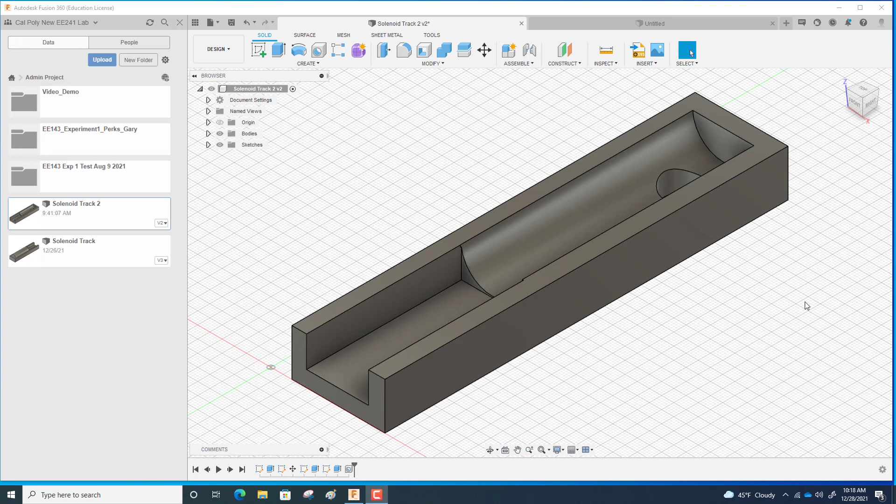So this is the solenoid track that I made in Fusion 360. Let's zoom out a little bit. It's just a block with a square portion cut out for the solenoid, and then there's this cylinder portion that the marble will roll on, and then the hole where the marble falls out, and goes into whatever Rube Goldberg mechanical structure you have.

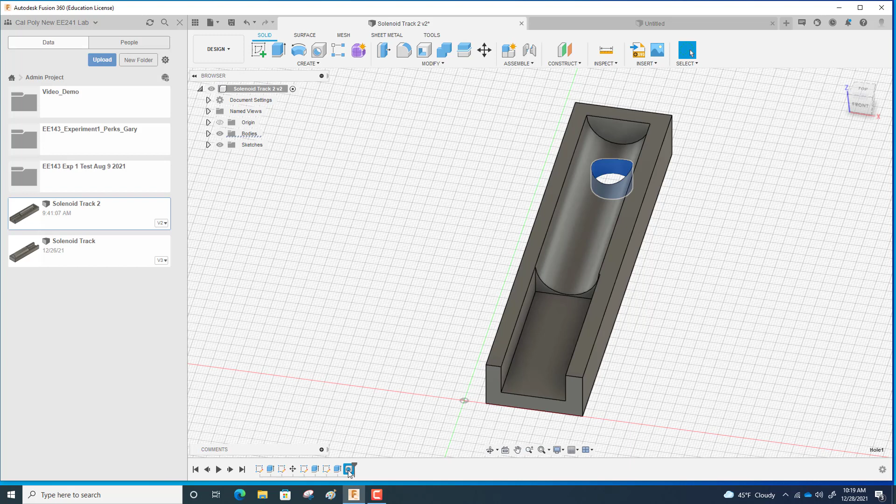So the steps, in reverse order: the hole is the last thing, and then there's a cutaway for the cylinder part. That circle is called a sketch, you'll see what that is coming up. And then there's a cutout for the solenoid. That square portion is where the solenoid fits in.

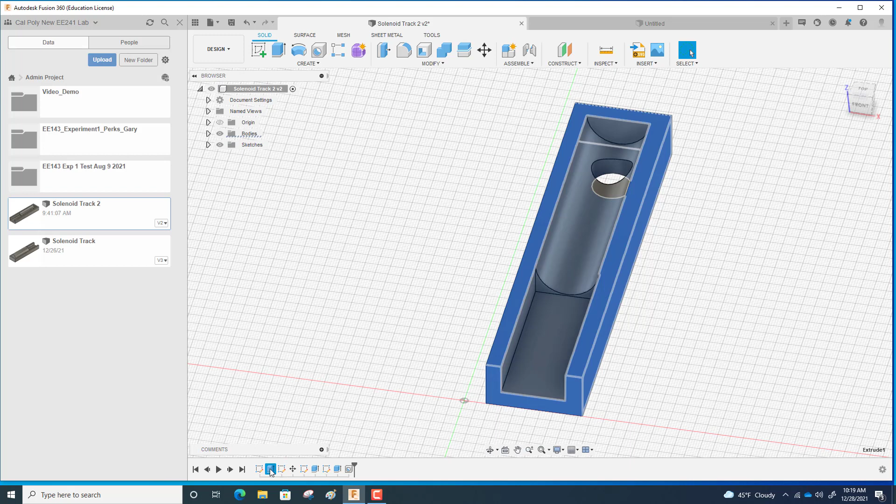That's another sketch. That was a move, another sketch, and an extrude to form the base before the cutouts. And then the first thing you do is a sketch. You'll see what a sketch is when I show you the steps here.

Let me just say right off the bat that I'm a novice at Fusion 360, so there's probably a more effective way of designing something like this, but I'm going to show you what I did.

One thing you do want to make sure when you open up the program: if the increments are not already set for 1 millimeter, you might want to go ahead and change that.

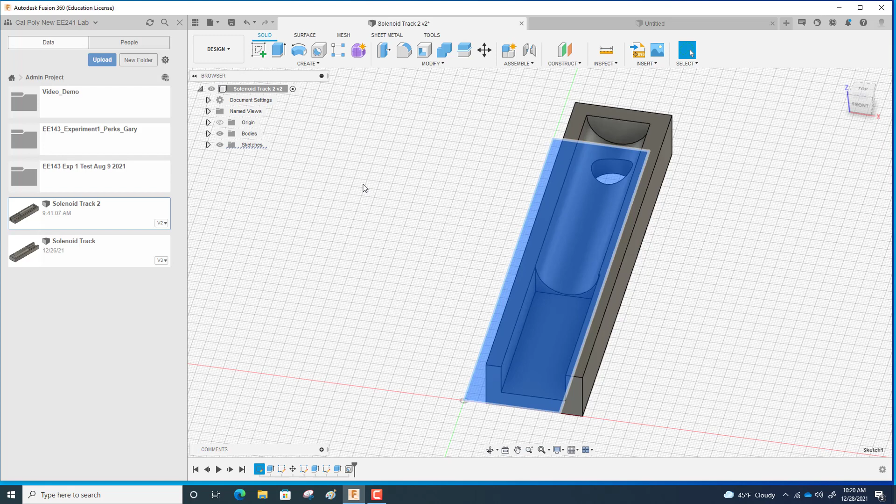Alright, so let me open up a file here so I can show you the steps involved.

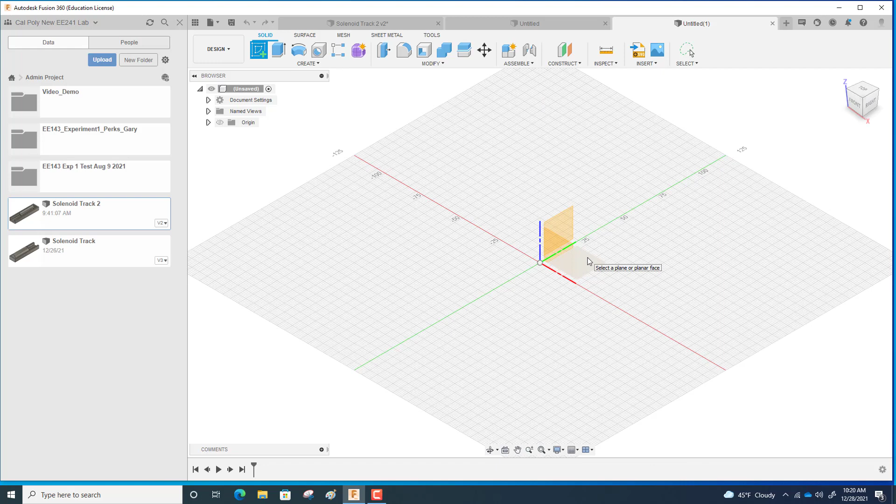So the first thing is you create a sketch. You come up here, create sketch, and you have to choose a plane for the sketch, and I'm going to choose the top plane. This gives you the view over here, the top view, and that's your top plane.

You click on the yellow square, and this palette comes up. When this palette is up, you know you're within a sketch, and you need a sketch to either build something, or if you have something and want to take material away, like you've got a block and want to take some of the block away, you also need a sketch. So you always pretty much start with the sketch.

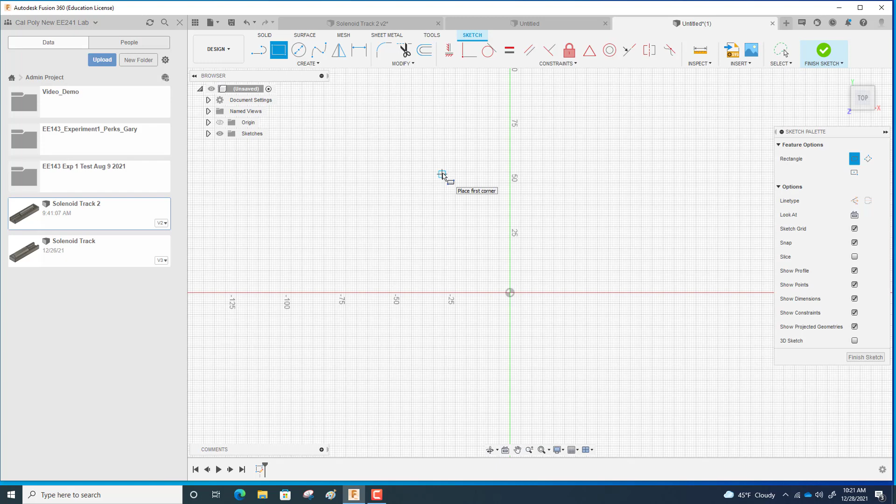So we're going to come up here to solid, 2-point rectangle. You just want to make a rectangle, and I don't know if you have to, but I always put the rectangle so that the origin is within the rectangle.

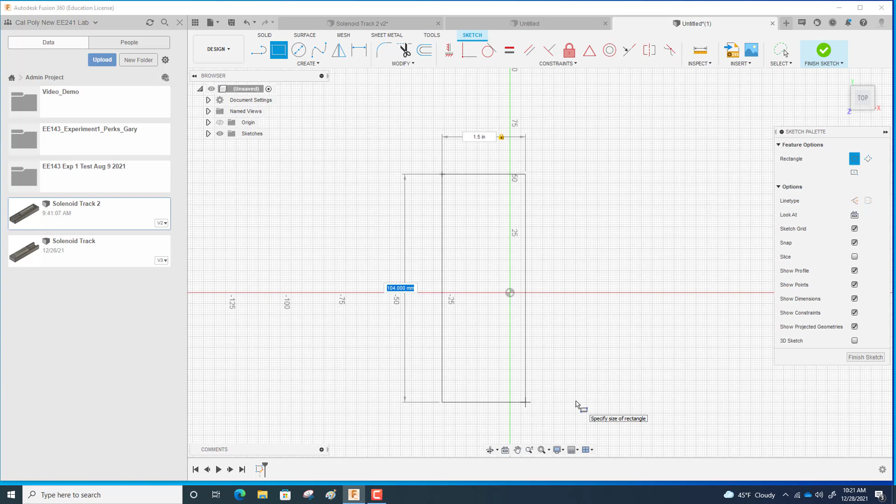You can see the top dimension is highlighted, and our width is, let's see, 1.5 inches I think, if I remember right. Let me measure my piece here. Yep, 1.5, and the length is 6.5 inches. So I'll put in 1.5 inches, IN for inches, then tab over to the other dimension, and the length I've got is 6.5 inches. Then you hit enter.

It took the inches and converted it to millimeters. So 1.5 inches is about 38 millimeters, and 6.5 inches is about 165 millimeters.

I have a mouse with a center wheel, which is really convenient when you use Fusion 360 because you can zoom in and out with the center wheel. You can also press down the center wheel to drag your view. So it's pretty convenient.

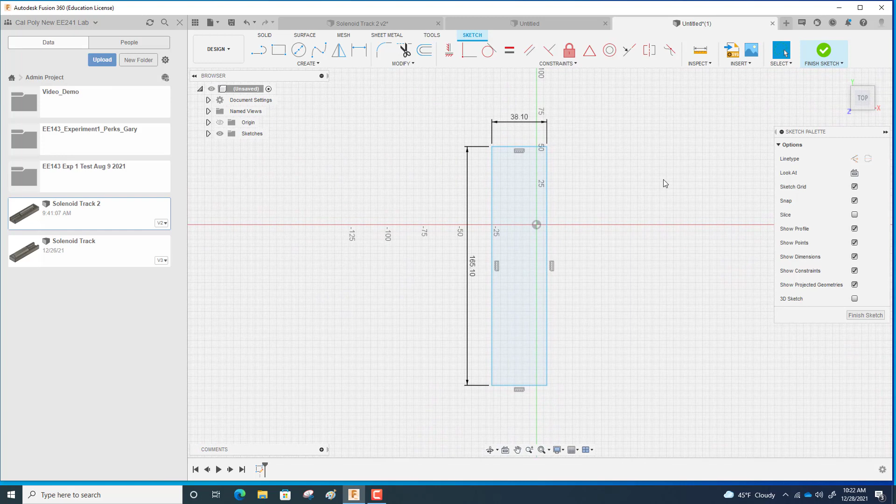Alright, so we are finished with the sketch. Now if you hit the home icon, it gives you an orthogonal view. And this cube is how you can change your view to look at the various angles, whatever view is most convenient.

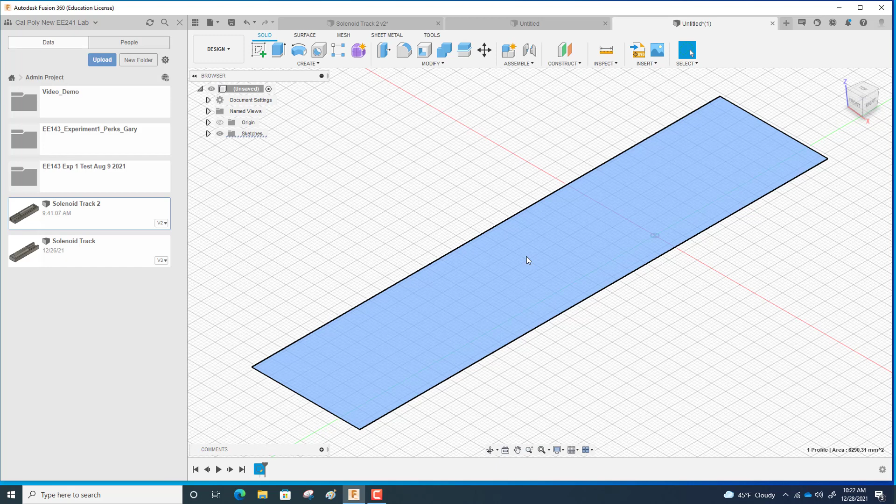Now I'm going to click on this surface, and we're going to do what's called an extrude. Up here, this is going to give the base height, and our height is 3/4 of an inch. That's what I used. Alright, so there, we've got our base.

This is basically our block that now we're going to cut away material to get our track piece. So let's go ahead and save this at this point. To save what you're working on, just hit the save icon up here.

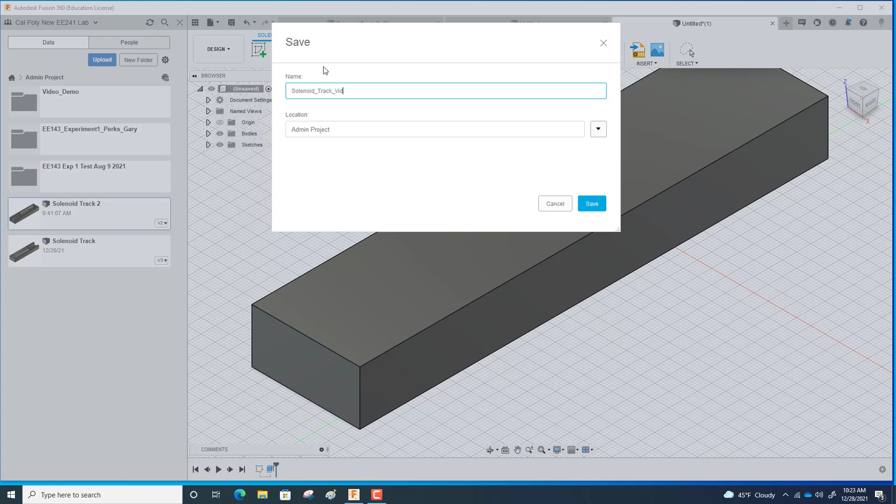We'll call this solenoid track... solenoid track video. Whoops, not spelling very good today. Let's see, video. And it'll just put it in this admin project folder. You can name different folders, but I'm just going to keep it there. So we'll save this.

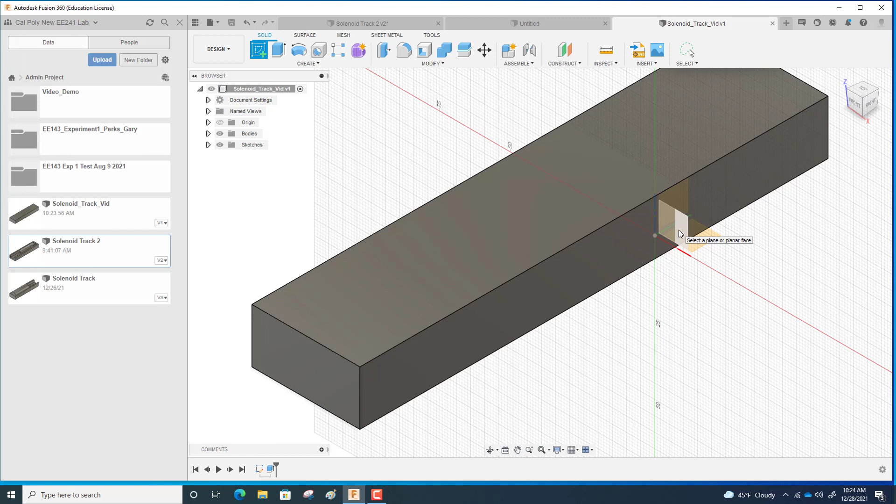Okay, so now we need to do another sketch because we're going to cut away some material. We need a sketch to do that. So create sketch. And this time I'm going to use the sketch in this plane here because I want to cut into the material lengthwise. Alright, and we're going to do another 2-point rectangle. I'm just going to draw one here within the block.

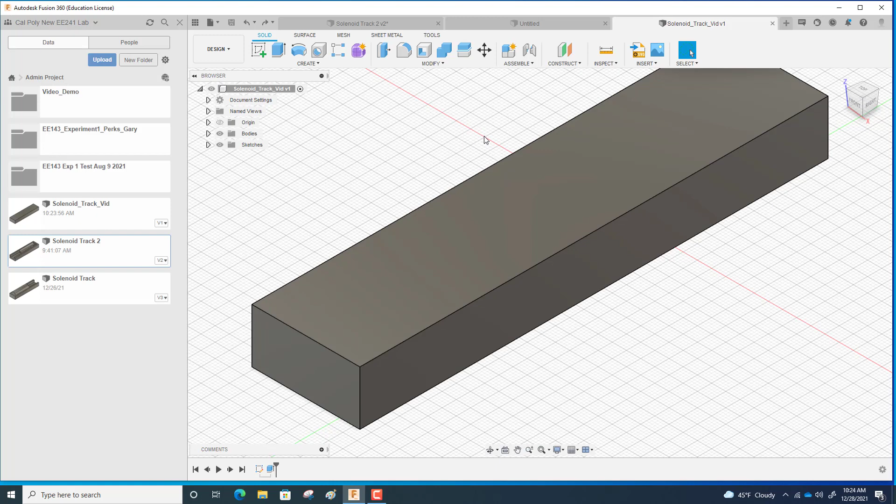Oh, let's back up here a minute. Let's back up. We should move this block first, because when it makes the sketch, it's on this origin. So let's hit the move. I can just back this up here. I just want to back this up about to the origin here, so right about there.

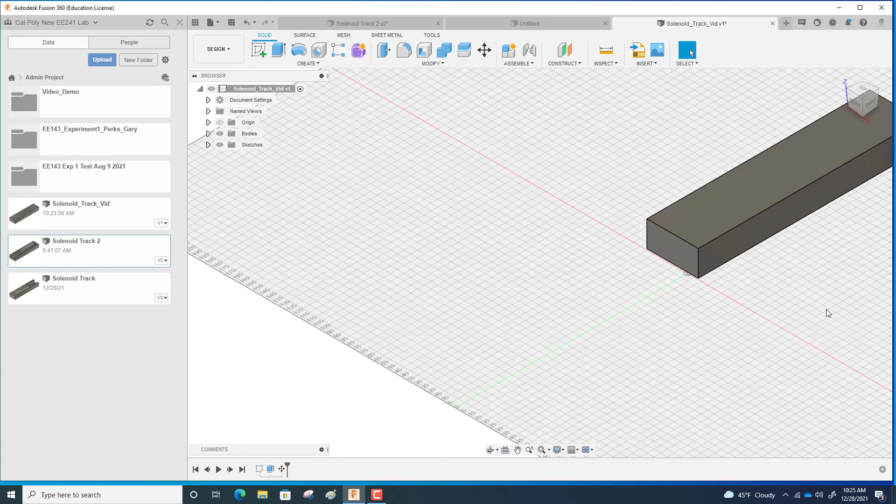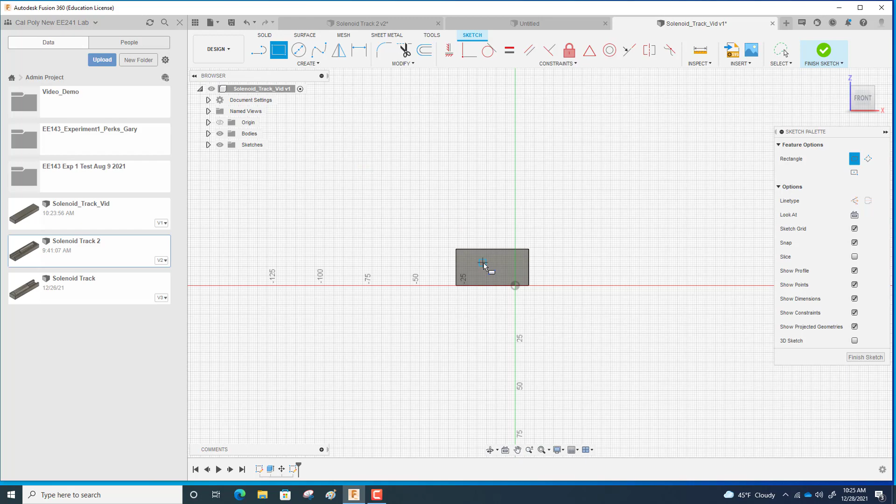And that's because when we create the sketch and choose the plane, it's right at the origin. So if I had the block where it initially was, the sketch is like within the block, and I want it to be on the edge, because we're going to cut into it lengthwise. Alright, now we can do our 2-point rectangle. Let's see if we can make this bigger here. And I can drag it over. Alright, so I'm just going to put this rectangle within here and then put in dimensions.

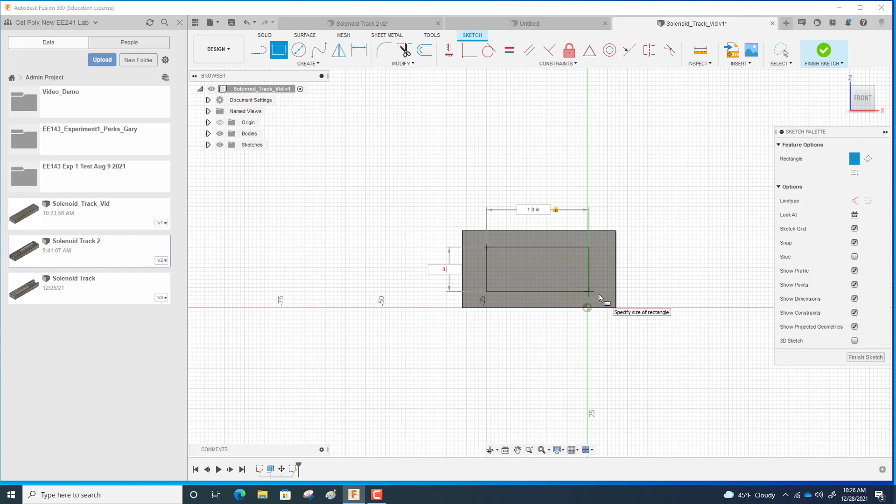Let's see, the square notch is 1 inch by 1/2 inch. Alright, so 1.0 inches, and then you tab over for the other dimension. 0.5 inches, and then once you get the dimensions, you hit enter.

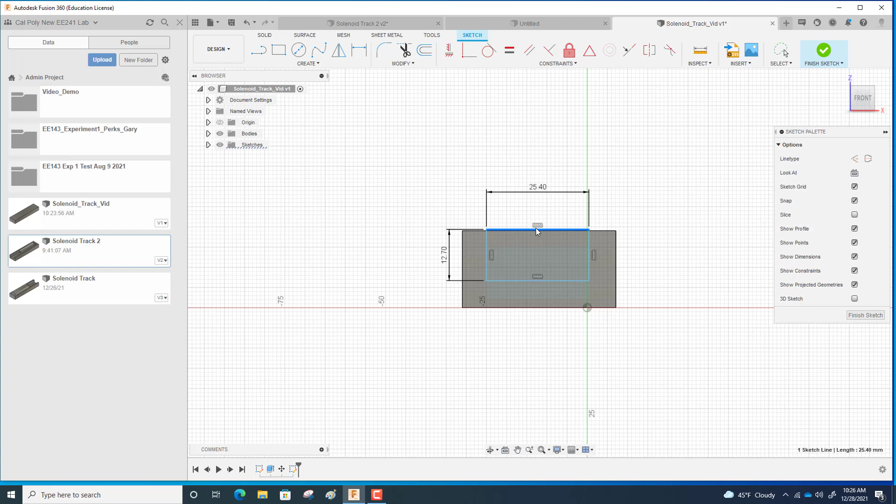Alright, so now we want to move this sketch, and I want to make sure it cuts away all the top, and I'm going to eyeball it as far as centering it. See, I'm counting the squares there. 7. What's on this side? Oh, maybe a little bit over. I think that should be close enough. Alright, and then you select this, and let's see, finish sketch, and then we want to do an extrude.

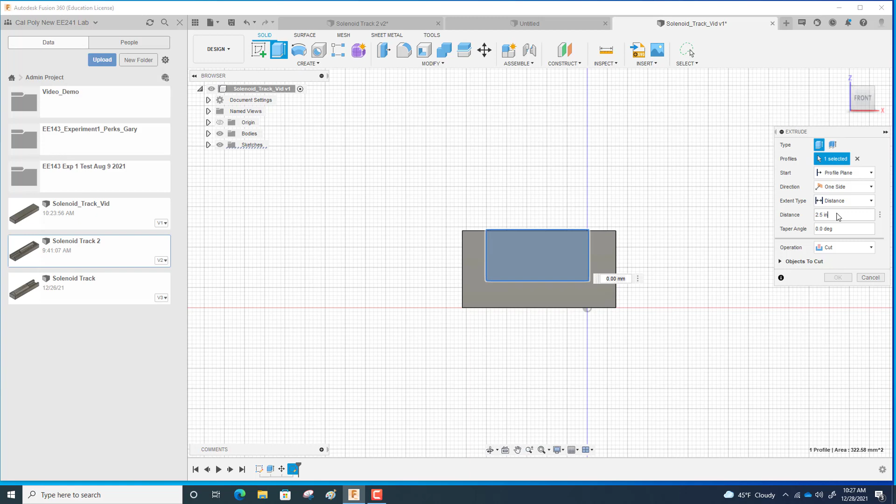Alright, so now we want to cut away material, so down here at operation, you want to choose cut, and we're going to cut into this. Let's see, what is it? I think it's 2.5 inches. Yeah, about 2.5 inches. So this distance here is how much we're going to cut into it. So 2.5 inches. And okay. Let's see, how did we do? Yep. All right, it worked. Okay, so you see it made that square notch.

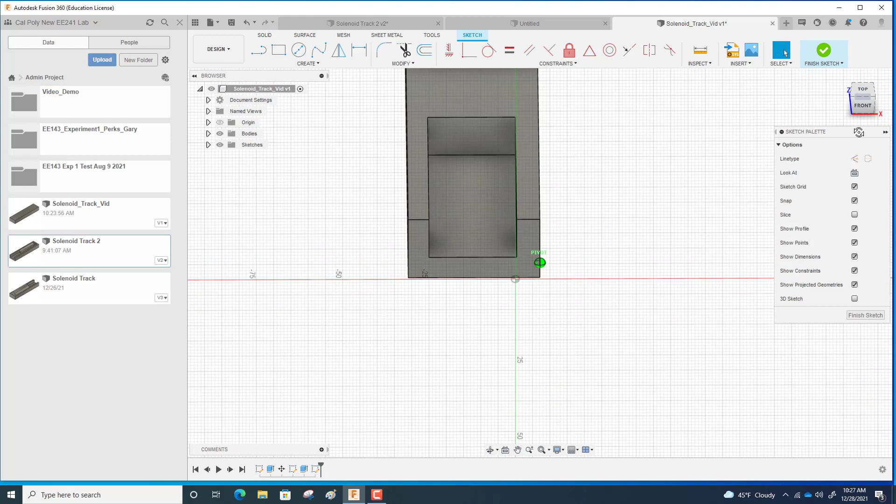All right, now we want to do the cylinder part. So we need another sketch for that. Select the sketch, and again we want this plane here because we're cutting into it lengthwise. Okay, we're gonna need a circle. And let's see, we're gonna center this. Now, you don't have to be super precise here. I'm just gonna eyeball it. So, yeah, it looks right about there. It looks close to the center, I would say.

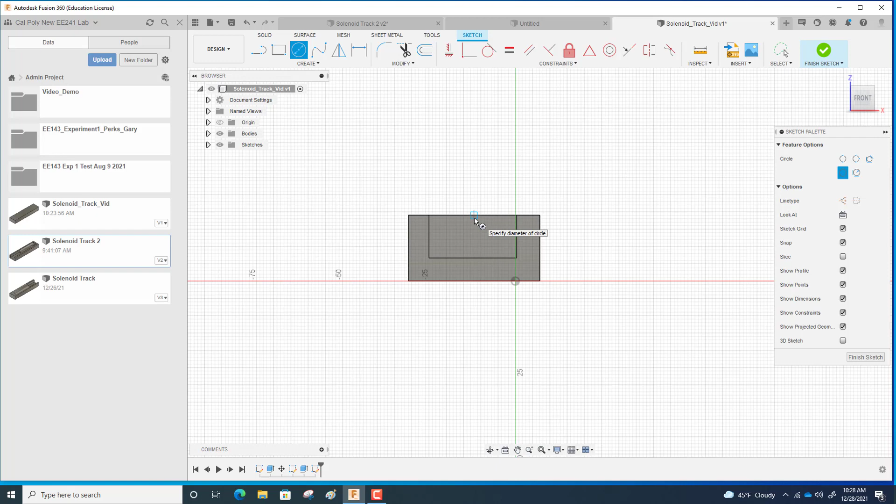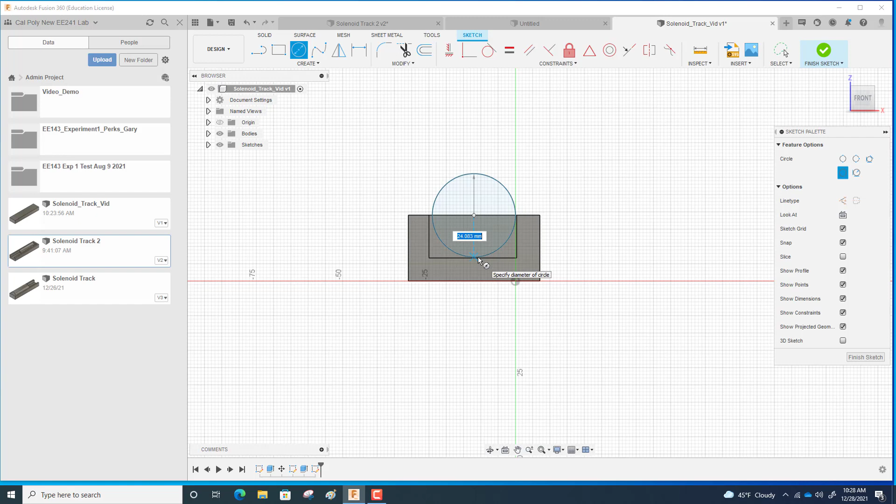All right, and then we're gonna expand this out. So it looks like right about there. Let's see, if we move it just a little bit here. Let's see, we'll say it's like 25 millimeters. What does that give us? Oh, I somehow got two. Looks like I got two in here. Let's back up. Alright, there we go.

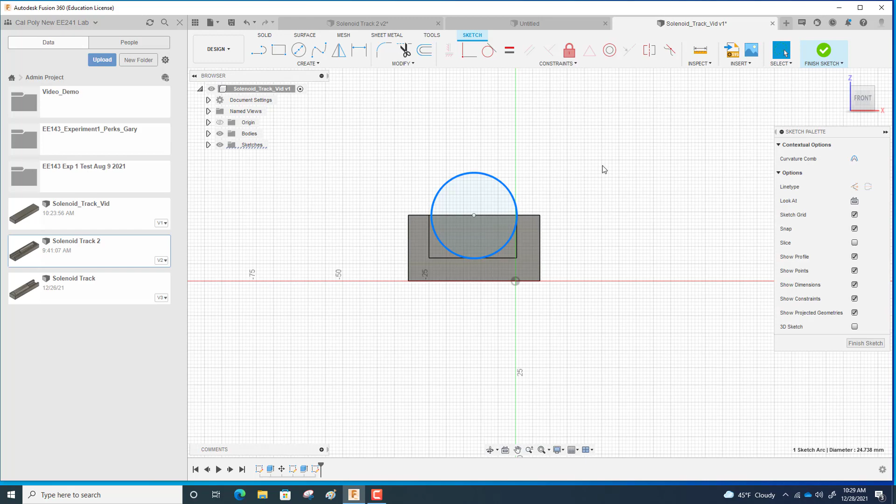And let's see. Yeah, right about there. Alright, that should be close enough. Alright, so now that's the sketch. But now I gotta move this. Or actually, I don't have to. I could just do it. I was thinking I could move this to where we're gonna start the cylindrical. Yeah, actually I should. So let's move this.

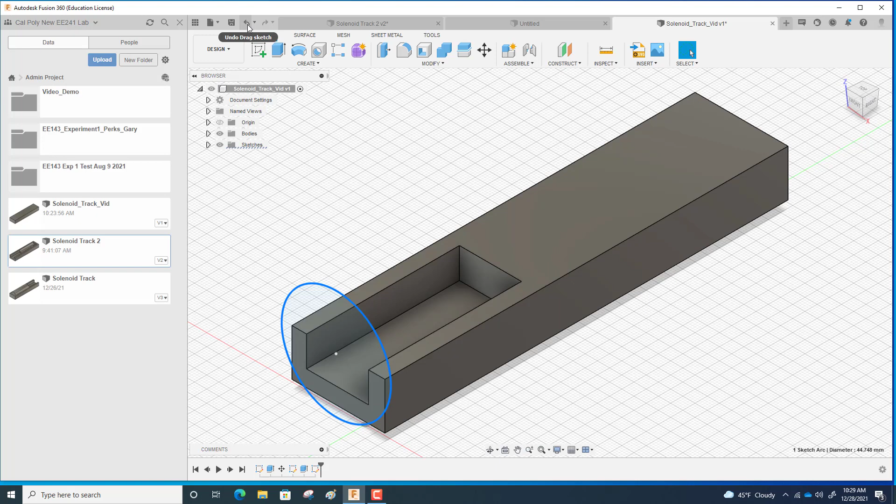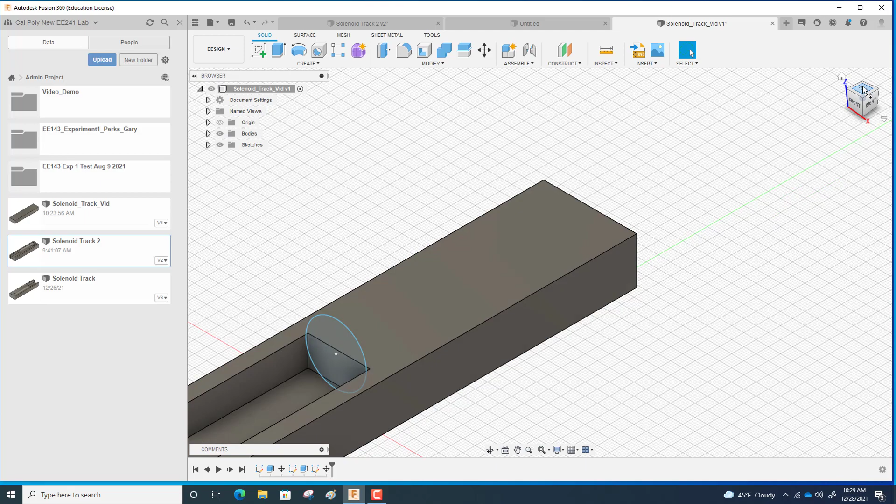Oops. Move. Right, move this like this. Let's take a different view here. Let's see. I gotta move this some more here.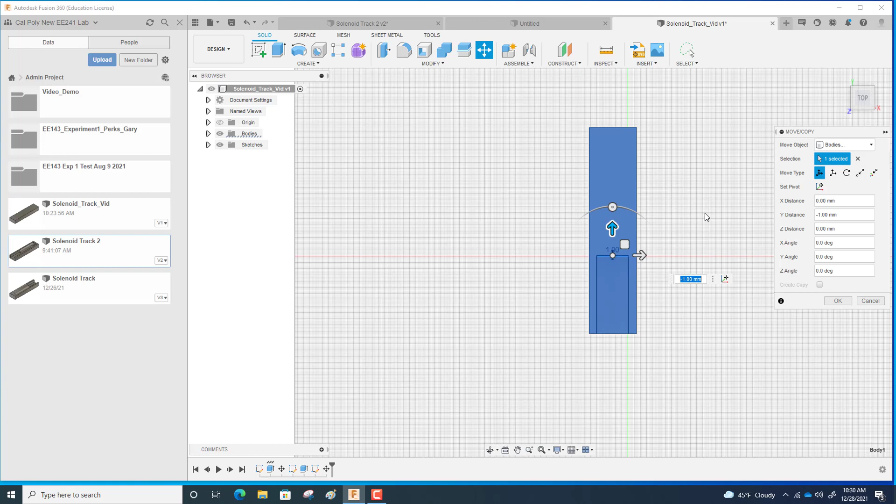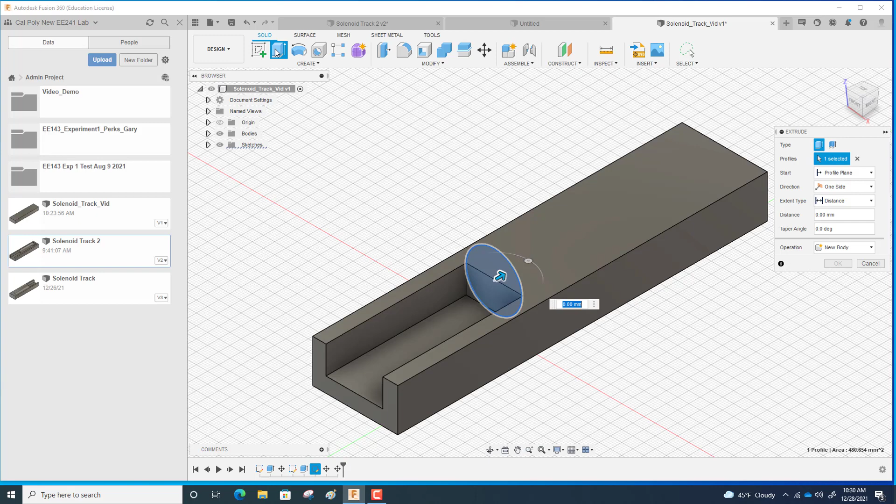Like I said, you don't have to be super precise on this. Alright, so that's the move. So now, let's see. Alright, so now we want to choose this and do another extrude. And this is going to be about 3.75 inches. So 3.75 inches. And there it is. All right.

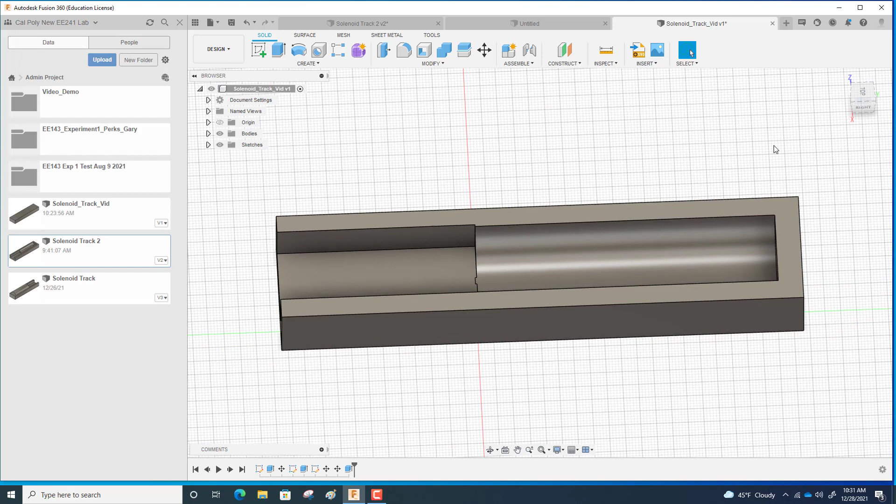Okay, so we made that cylindrical part. So the only thing left we have is just to make the hole here towards the end. So to do that, we're going to flip this on the bottom side. And let's see, create a hole. And we want it on this plane. And we want the hole to be about 5/8 of an inch, so that's 0.625 inches. And let's see, we want this.

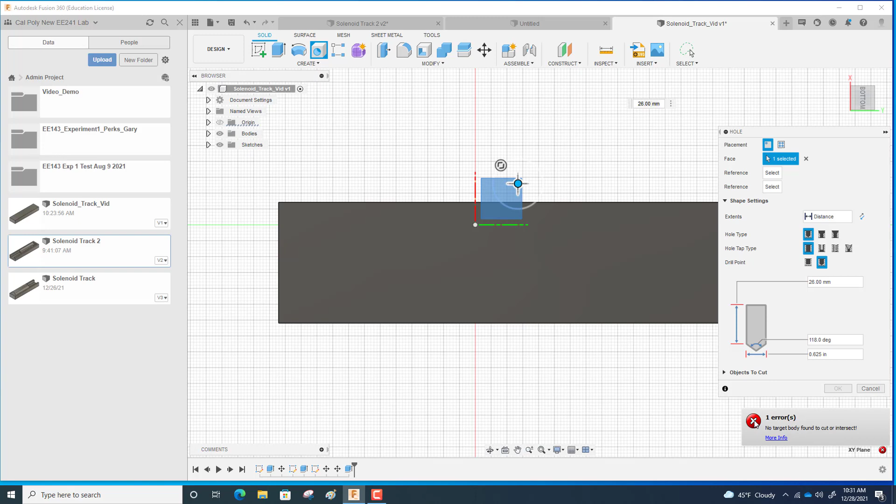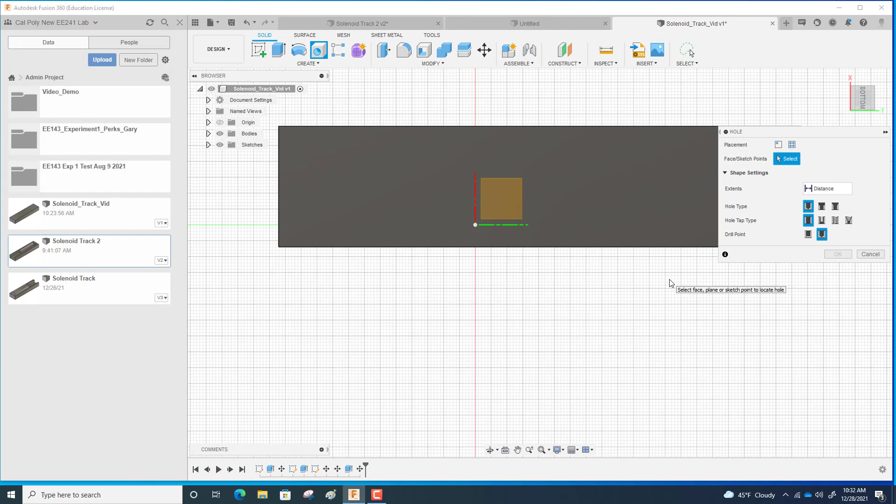Oh, got the error because the hole wasn't on the actual piece. I gotta move the, let's cancel this. So we gotta move this. Let's try it again. Okay, yeah, see the plane's got to be on the piece, otherwise it doesn't know what to make the hole into. So we want this plane, and then I think I can just drag this. Yeah, here we go. Let's move this out of the way.

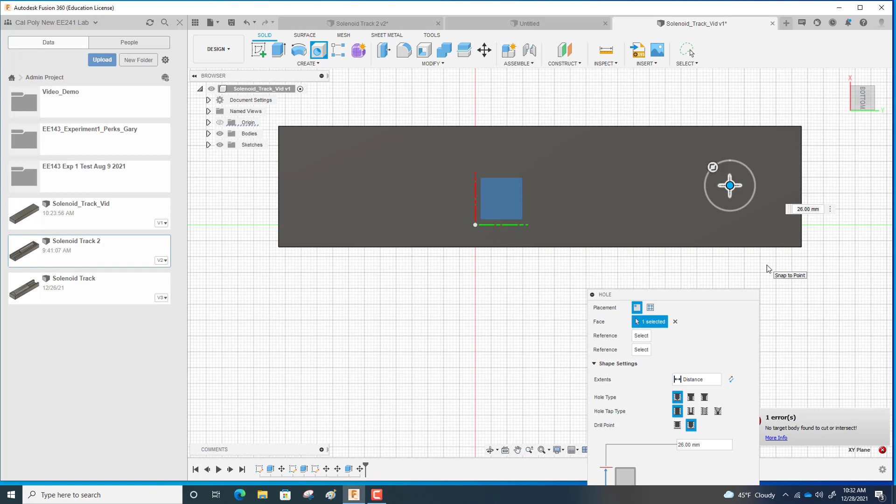And I know this is right about here. Again, I'm not being super precise. You can use these grids here to get a more accurate placement, but that looks just about where I want it. So let's see, oh, we got to put in the diameter of the hole. That was 5/8 of an inch, so again, that's 0.625 inches. No target found. Whoops. I don't know why we got that error this time.

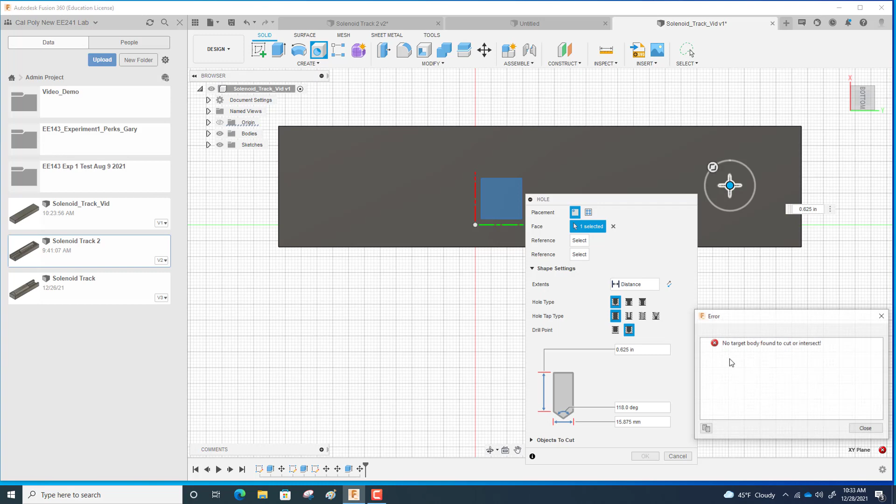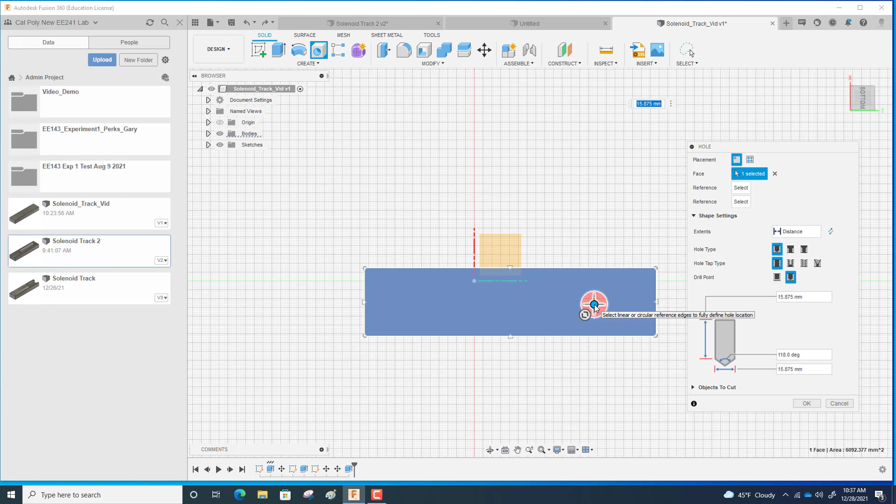Okay, so to make the hole, you click this icon here and then choose the surface that you want the hole. I was choosing the plane, but it's choose the surface. And this is the bottom view of the track piece. So now we just want to put in 0.625 inches. Okay, and there's the hole there.

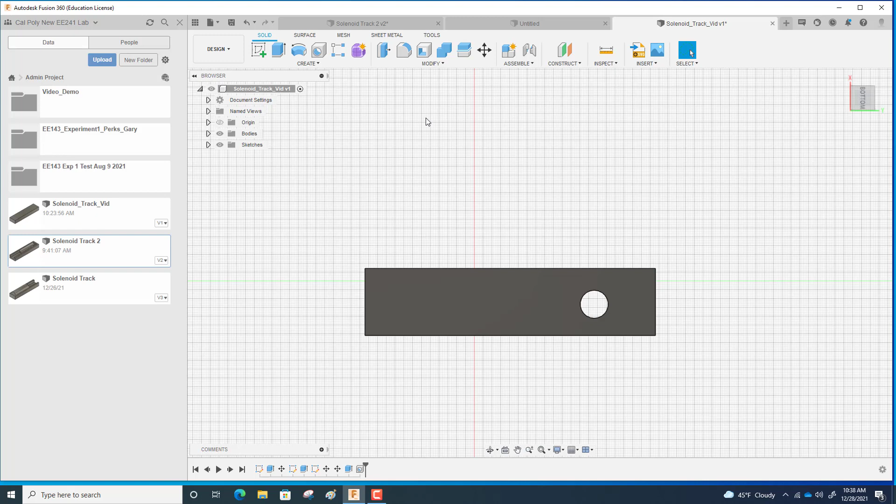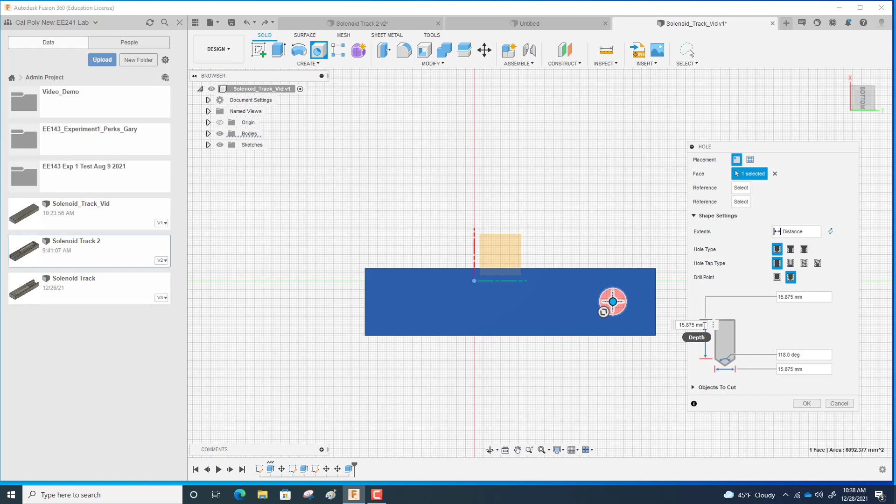I wasn't real careful with the placement, but before you put in the size, you can move it. Let's see, maybe we can back up and try that again. Let's see if I do the hole. I choose this. Yeah, see, before you actually put in the diameter of the hole and hit enter, you want to place it. So we'll put it right about there. I think that's about right. 0.625 inches. Alright, so there it is.

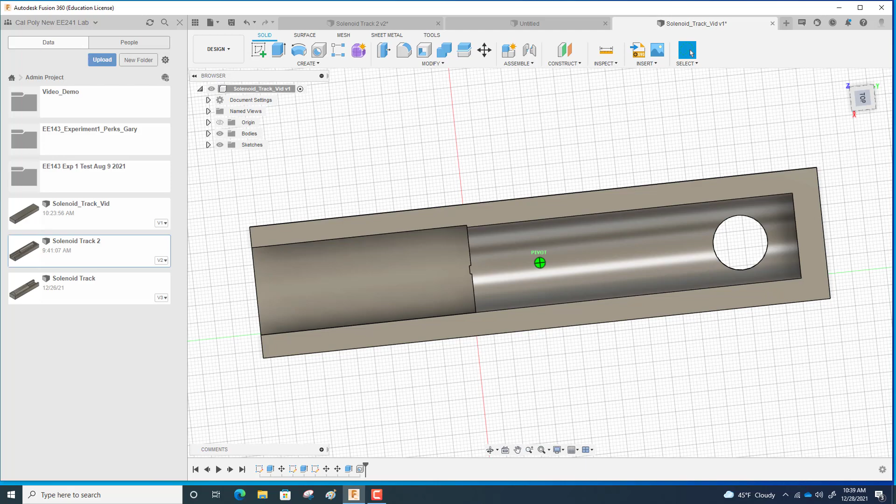Okay, so now we've got everything. We've got the square portion where the solenoid's going to fit into. We got the cylinder portion that's really part of the track where the marble rolls, and then the hole where the marble will fall through and continue down whatever mechanical apparatus the Rube Goldberg machine has. So anyway, like I said, there's probably a more efficient way of making a track like this in Fusion. I'm just a beginner, as you can tell from this video.

I still kind of just stumble around and figure stuff out, but the key to Fusion that I have found is anytime you want to build something, or take away material, you often start with a sketch. I guess the hole is one exception, because we didn't have to do a sketch to make the hole, but in order to make the base, the block, and then take away the square portion and the cylindrical portion, we had to start with sketches.

Alright, well hopefully this video was useful, and the track that you make doesn't have to be the same as mine. If you want to make it a smaller piece so it won't take as long to 3D print, that's fine. Also, there's not a requirement to use this particular track piece to hold your solenoid in your Rube Goldberg machine, because you may have some setup where this track doesn't fit, but you do need some way to secure your solenoid, as you'll see when you see how it operates. Because if it's not secure, the solenoid's operation can be intermittent. So you do have to design this track piece for this lab, but you don't have to actually use it in your Rube Goldberg machine if it doesn't fit.